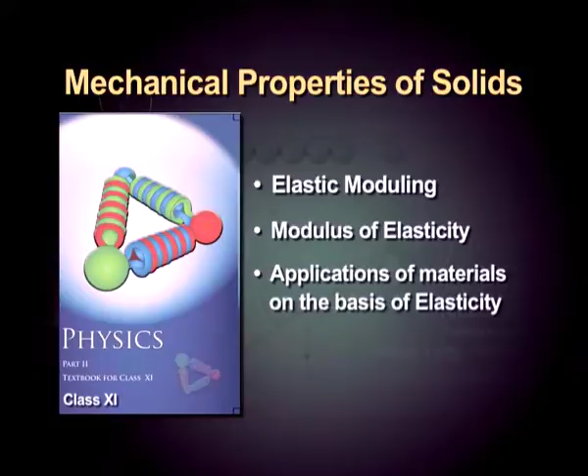In our previous episode on solids, we learnt about their internal structure. We learnt the attractive and repulsive nature of intermolecular forces were responsible for the property of elasticity, which is when a deforming force is removed from any solid, it regains its original structure. This fact could not go on beyond a particular point, meaning you could not endlessly increase the deforming force and expect the body to come back to its original shape and size. You will also recall we looked into terms like deforming force, which were external forces acting on a body.

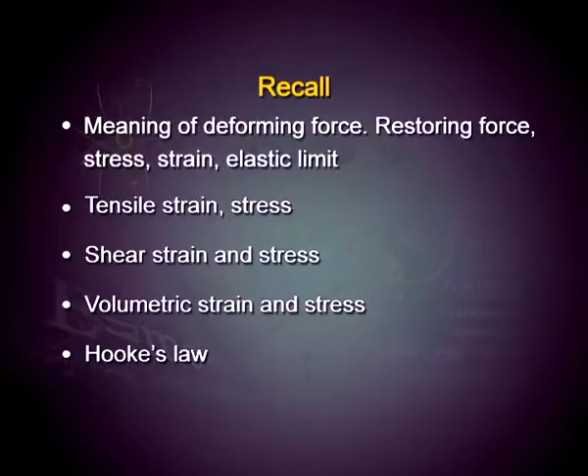These forces depended upon the nature of the solid structure, and therefore you categorize them into three classes. If the solid has more length, like a rope, you would be talking about tensile deforming force, and consequently the restoring force which developed inside it per unit area, you called stress. The measure of how much deformation took place along its length was longitudinal strain.

Likewise, you studied solids where deformation took place because one particular section was displaced, such as in the case of a book, where if you were to deform it by pulling only on its surface, it would deform with a shear force. The base of the book remained where it was, and the displacement on top with respect to the base would be your shear strain, and you could measure shear stress. This was done with solid structures like this mentioned in your books, which had a geometrical shape because it was easy to calculate the area.

You also studied about volumetric stress, which would happen if the deforming force was hydraulic in nature. For example, on a spherical ball like this, if the deforming force was from all directions, meaning a hydraulic pressure was acting on it, the ball would shrink in size, its diameter becoming smaller, but its shape not changing. That would account for volumetric strain, and the internal stress developed per unit area in it would be termed volumetric stress.

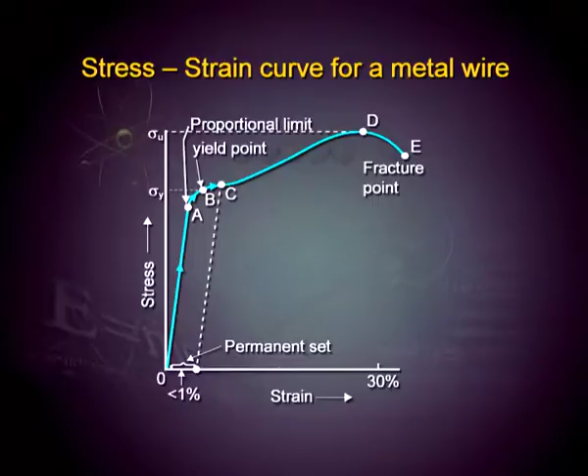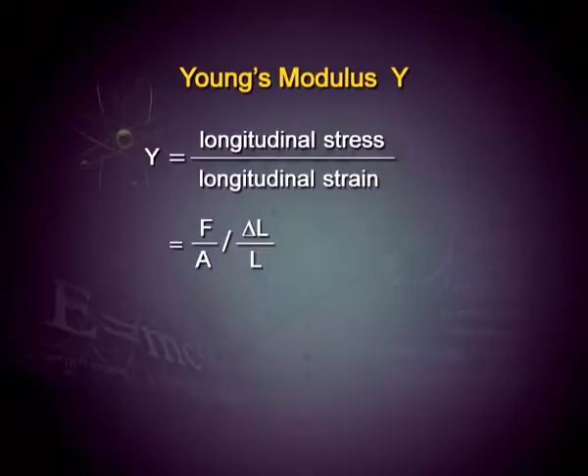Now we are going to look at the ratio of stress and strain, which according to Hooke's law should be related. We did a graph for that in our previous episode, and we are going to now describe the modulus of elasticity. Tensile modulus of elasticity is called Young's modulus, measured as the ratio between longitudinal stress and longitudinal strain, given by F upon A divided by delta L upon L. It has a unit of Newton per meter square, and its dimensional formula would be M L minus 1 T minus 2, same as that for stress.

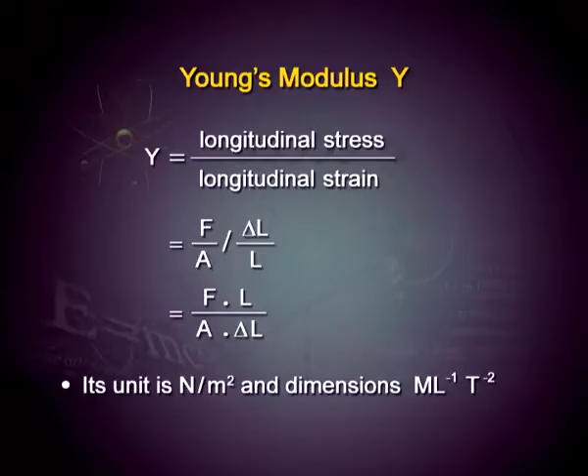Now, if you look at some common materials around us and study their Young's modulus, notice that the order of magnitude is 10 raised to power of 9 Newton per meter square, which is a very large value. For steel, for example, it is 200 into 10 raised to power of 9 Newton per meter square. In the same table, you can also see the elastic limit value and the tensile strength.

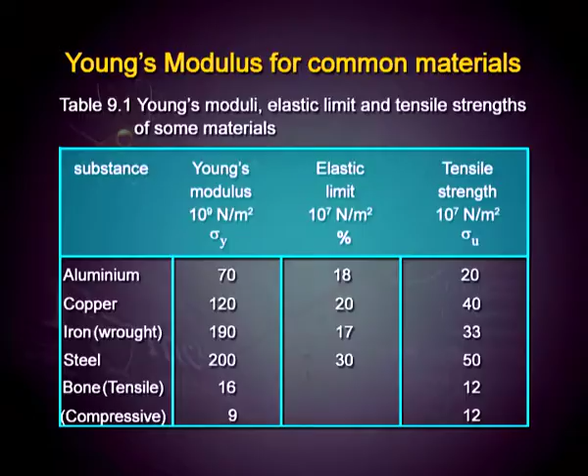Notice for bone you have two values given, in terms of tension and compression. This is slightly different, and should be taken into account if you were to measure the elasticity for bone, in order to know why a fracture takes place or how you can make a pyramid. So when you are asked which is more elastic, steel or rubber, obviously steel is more elastic compared to rubber. Why? Because you can break a rubber band with just your hands, but it is not possible to do so for a metal wire.

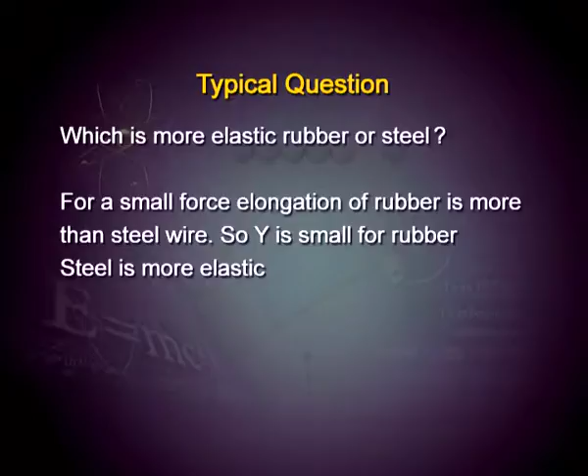Bone structures, as we were talking about, you must have seen in the case of pyramids, where you have people one on top of the other, and at athletic meets, etc. These kinds of structures are often done in school. But you must have seen that only very strong people go below, and the people from junior classes with lighter mass of bone and lighter weight go on top.

Engineers and product designers need the value for Y. How do we determine the value for Y in the lab? It is done by using Searle's apparatus. In Searle's apparatus, you have two wires of about 1.5 meters in length, and let us mark one as A and the other as B. A is called a reference wire, and attached to it is a weight so that it remains taut all the time, and wire B is the one on which you apply some load, which will cause it a tensile deforming force, meaning trying to elongate it.

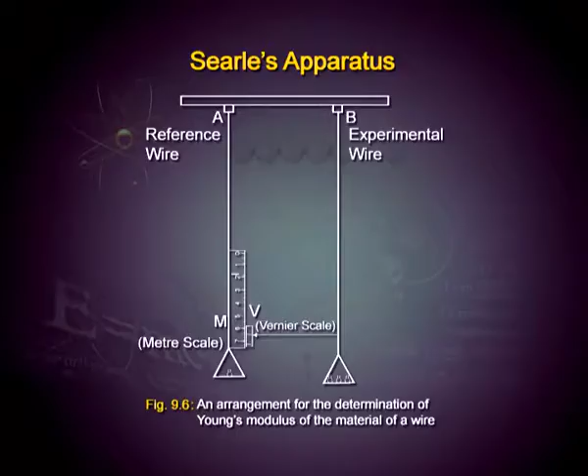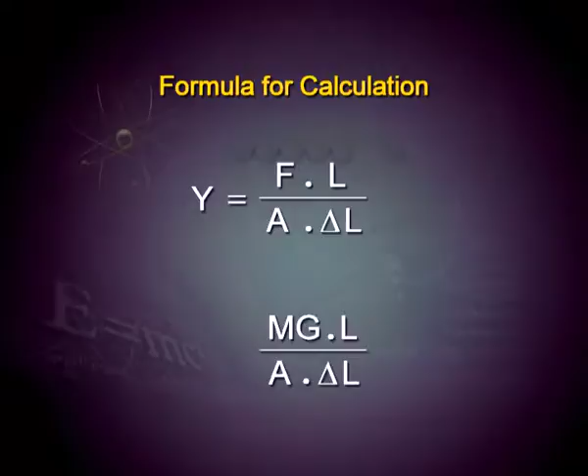A vernier is used in order to find how much elongation is taking place with respect to wire A. Having gotten all this, you can find the diameter of the wire and calculate the restoring force which is set up within wire B, which would be your stress, and then calculate the value for Y. So your working formula would be Y equals mg into L upon A into delta L.

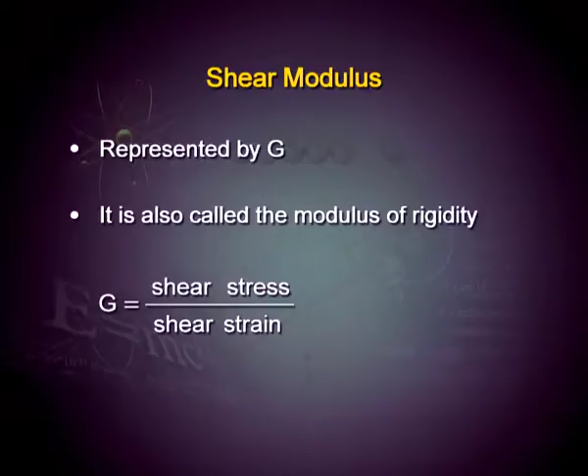Shear modulus, on the other hand, is represented by G, and it is given in terms of shear stress and shear strain. So how do you measure this thing? This is a very simple example, in which only one portion of it, that means the top layer, is moved, like boxes, cartons, etc.

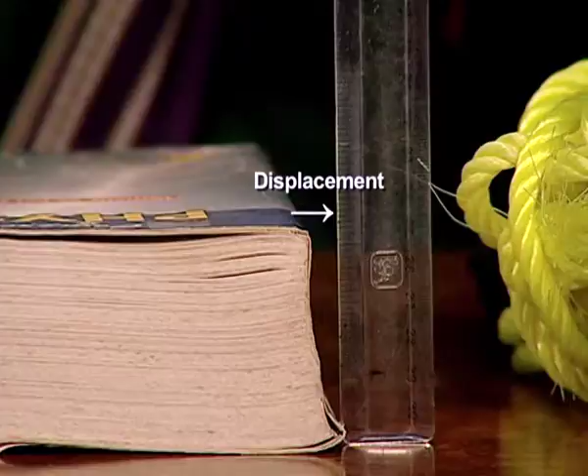You can measure it by taking a book and keeping the edge of a ruler alongside its binding, and when you pull only the top cover using suitable force, you find it is displaced to a certain extent. This displacement can be measured, and you can also find the surface area by multiplying the edges and finding a product for that. The value of your force is known, so the shear force can be calculated, and therefore you can also calculate the shear stress and the shear strain.

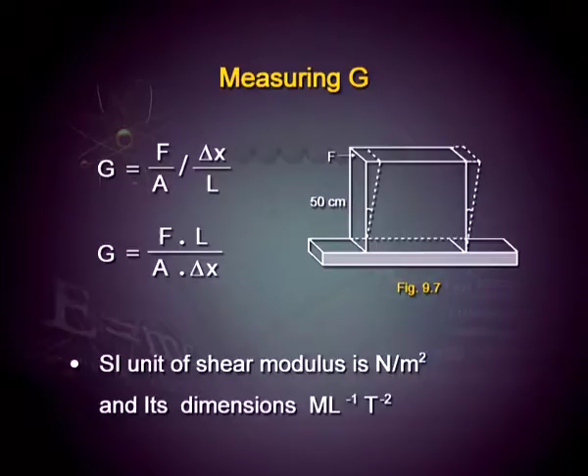So you have seen you can find the value for G in the lab for objects which are not so rigid, and you find its value is given in terms of Newton per meter square. Its dimensional formula remains M L minus 1 T minus 2. Looking at this chart, you will see that for most materials, the value of G is almost one-third the value for Young's modulus.

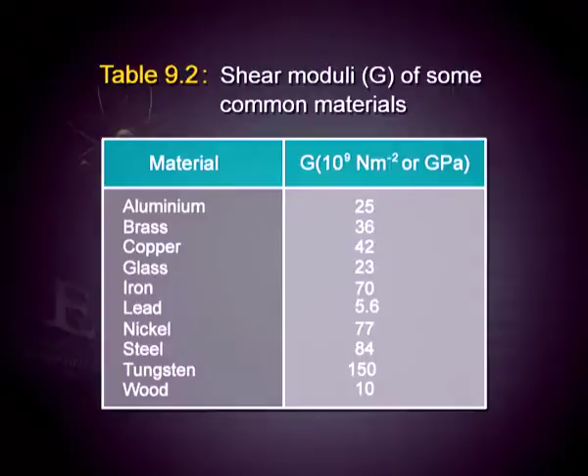That means, if you had a solid plastic cube and you found its Young's modulus, it would have a certain value, and if you did the same for shear modulus, it would be one-third. So the same material will have different values for Young's modulus and shear modulus.

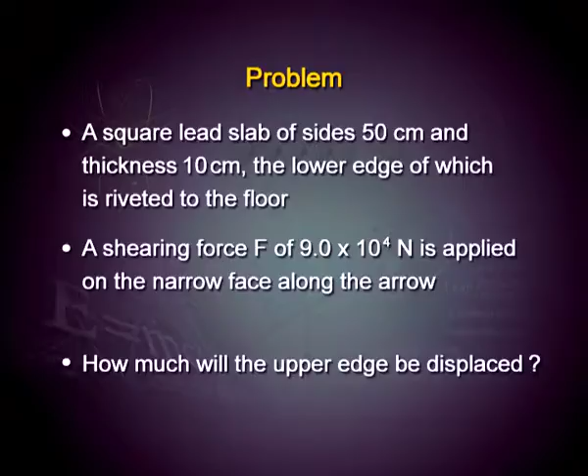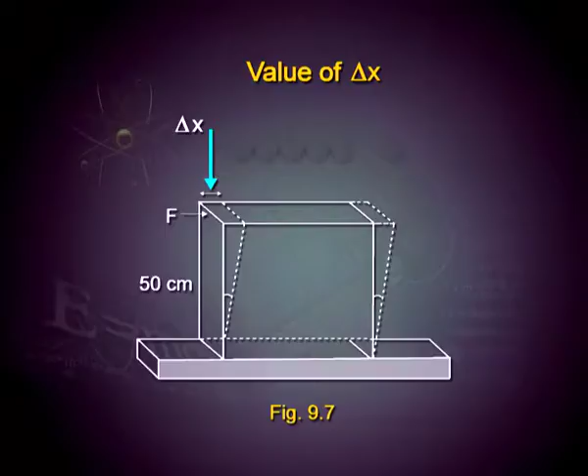Let us take up a problem. If you have a square lead slab of size 50 centimeters and thickness 10 centimeters, the lower edge of which is riveted to the floor, a shearing force of 9 into 10 to the power of 4 newtons is applied on the narrow face. How much will the upper edge be displaced? You can visualize it something like what we did with the book, and when you solve it, you find that this displacement is 0.16 millimeters.

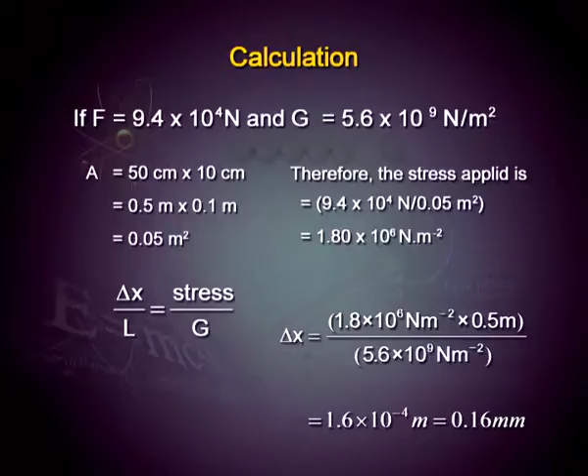So this value is very small and has to be carefully measured. However, when you do this problem, it gives you an idea about how much shearing force is required if you want anything to deform, or if you do not want it to deform.

Next, we go on to volumetric stress and strain. The ratio of volumetric stress to volumetric strain is known as bulk modulus. It is represented by B, and it is very special. Notice, if I were to give this ball a hydraulic deforming force from all sides, I am going to diminish its size, that means I am going to make its volume less.

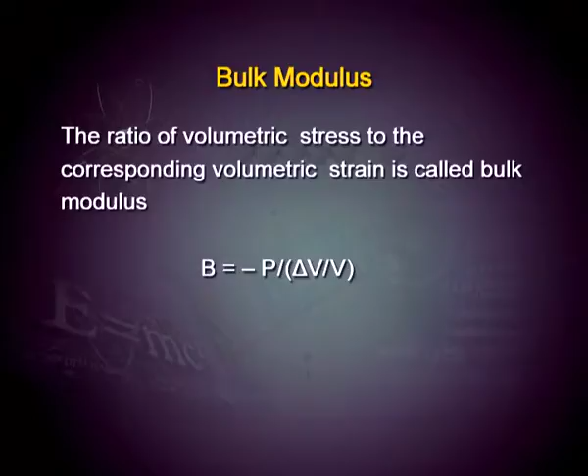So positive pressure on it is going to make its volume become less. Therefore, the value for B is associated with a negative sign. It is given as B equals minus P upon delta V upon V. The rest of it does not change very much, and this value is given in terms of Newton per meter square, and it also has the same dimensional formula.

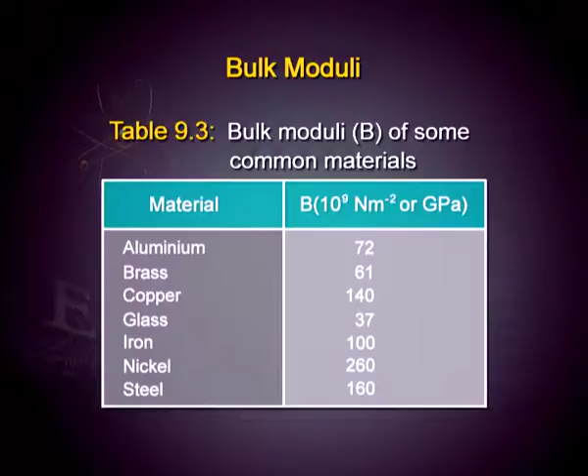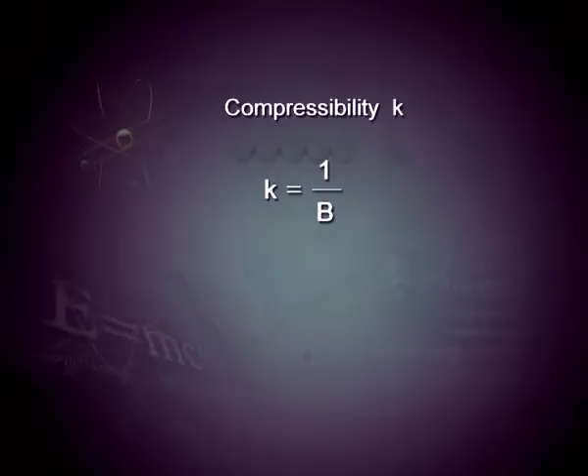Bulk modulus of some materials are given: aluminum, brass, copper, same as those in the earlier list, including steel. But there is no such straight relationship between bulk modulus and Young's modulus as we had seen in the case of shear. Compressibility is another very important value, and that is 1 upon B. It is the fractional change in volume per unit change in pressure.

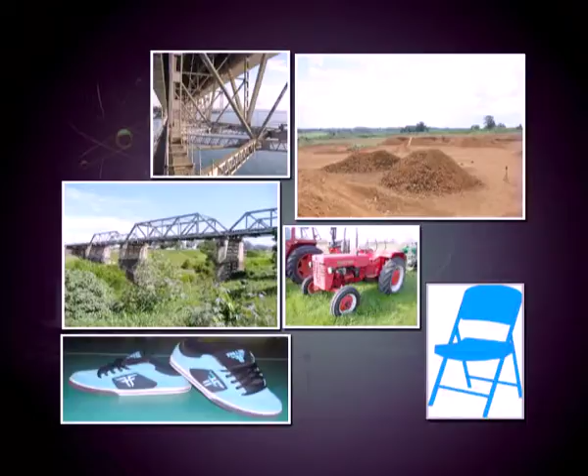These are some of the moduli that we consider for solids. In real life, how is it important to us? Let us consider the chairs that we sit on, the shoes that we walk on, the flyovers or the bridges that we step on. All these things are engineering marvels, you can say.

You can change the value of Young's modulus by changing the material that it contains. For example, tires etc. used for vehicles are all made of rubber. They are the same as the eraser that you use in your geometry box, but they have a content of carbon which is designed to take on the weight on the road of the vehicle and designed to take the elasticity with the bumps on the road, etc.

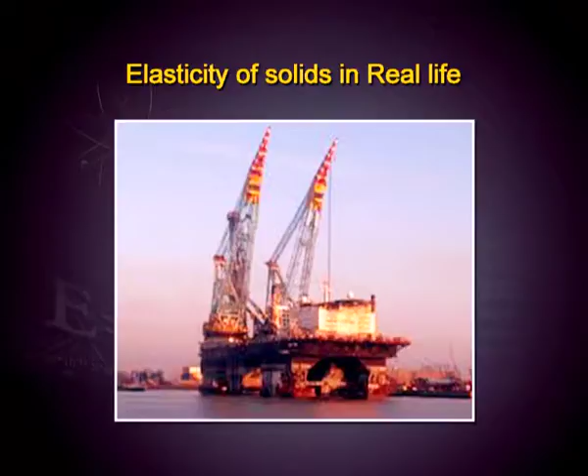One of the other things you need to see is how elasticity changes the way we design things. For example, the ropes used for cranes are not solid; they are made up of thin wires. Why is that required? Let's see from an example. If you had to lift say 1 ton of material, about 1000 kg, your requirement for a steel rod would be about 6 centimeters diameter, which is reasonably high, and therefore this would be solid and not flexible at all. So what is done is you have thin wires which make up the entire rope in this manner. That means you do not compromise on the strength of the rope, and you change it by making it a composite unit of thin wires, so that it has flexibility and can be used wherever you require it.

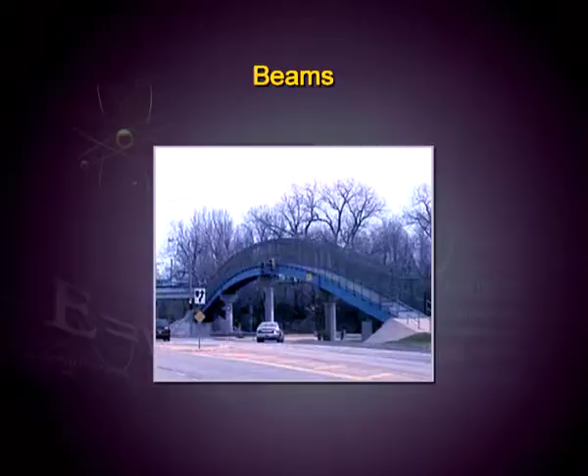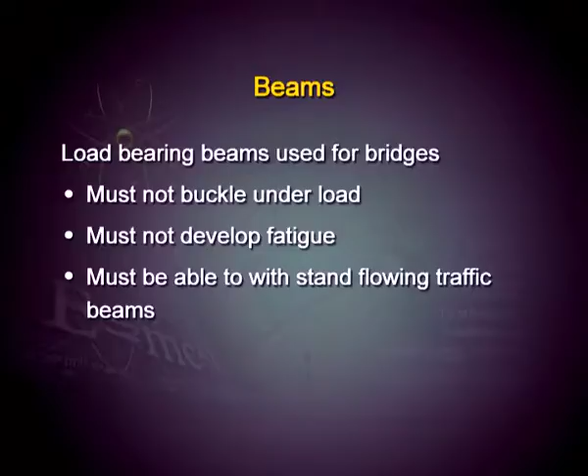Beams are used in bridges, flyovers, and railway tracks. Why is that? Because you do not want the load that comes on it occasionally, with traffic, to cause it to buckle under that load. Therefore, I-shaped beams are used. That is a special design which is ready to take on the deforming force and develop the requisite value for stress within it, so that for small strains it is able to maintain its elastic property. You do not want any of the bridges collapsing.

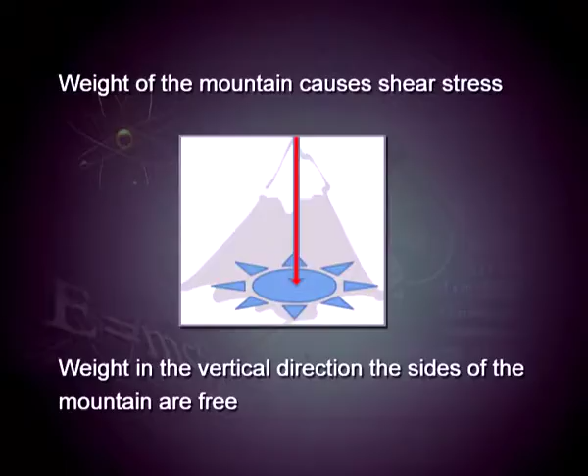One other example which strikes us, which ordinarily we do not think about, are the sand piles or gravel piles at construction sites. When loaded off from a truck, it piles up in a particular conical shape. Why is that happening? This is because of shear property. How does shear come into the picture? We are going to look at it from this example.

Why is the height of a mountain a certain value? Why aren't all mountains higher than Mount Everest? Why is Mount Everest so unique? What happens is that the weight of the mountain falls directly on its base. The sides of the mountain are free, and because of this it is not a case of compression. So when the weight falls on the base, the sideways force starts off as stress. The stress between the rocks at the base is responsible for how much force it can withstand from above. That means the deforming force accounts for its height.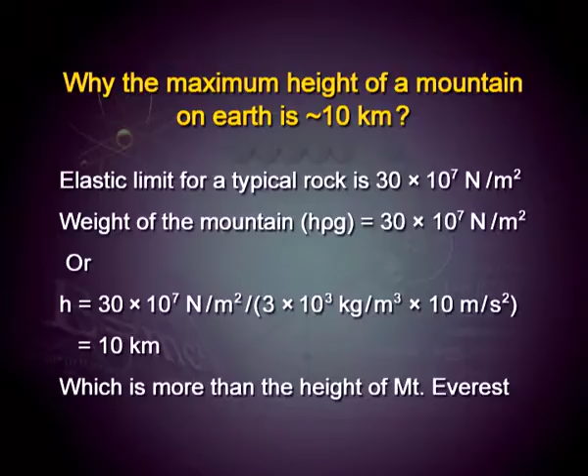Now let us calculate the highest height possible for a mountain on earth. This maximum height calculation is not that difficult; we are going to do it in a very simplistic way. Let's say the elastic limit for a typical rock is 30 into 10 to the power of 7 Newton per meter square. To calculate the weight of the mountain, we will need its assumed height, density, and g. We'll assume the density of the mountain material remains the same, taken as 3 into 10 to the power of 3 kg per meter cube, and that the value of acceleration due to gravity also remains the same and does not vary with height, which it actually does. With all these assumptions, we can calculate the value of h: 30 into 10 to the power of 7 Newton per meter square divided by 3 into 10 to the power of 3 into 10, which gives us approximately 10 kilometers, more than the height of Mount Everest. That means you cannot have a mountain on earth, given these specifications, higher than Mount Everest.

Why is Mount Everest only the highest one? Why aren't there mountains like this all over the world? They could have been—there are mountain ranges—but perhaps the shear force does not allow this height to be placed on any other portion of the earth, and that is why Mount Everest is the highest.

So today in this episode you have seen, with solids, the three moduli of elasticity, for three special shapes: one for length, like rods and wires or thin strips of metal; others for solid structures like boxes, solid square pieces or rectangular cuboids; or shaped like a sphere, like the ball we considered. So you can find the value of elastic moduli and compare it for a particular object. You can also find this by doing suitable experiments, and then we went on to see some applications in real life using the modulus of elasticity and our small knowledge about elasticity. After all, there is a lot to learn about the mechanical properties of solids vis-à-vis elastics and plastics.